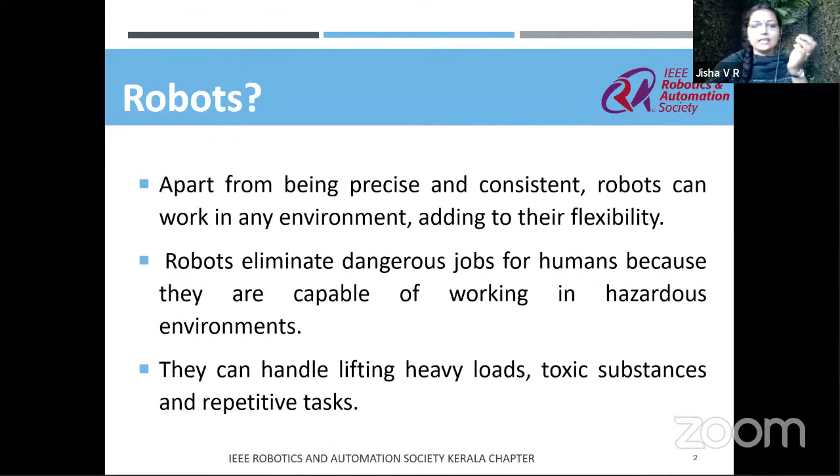And it has attracted many researchers, even though they belong to mechanical, electrical, electronics, or computer science streams. People from many streams are working together to build robots which can serve society. So I thought of taking you all through the current robot statistics.

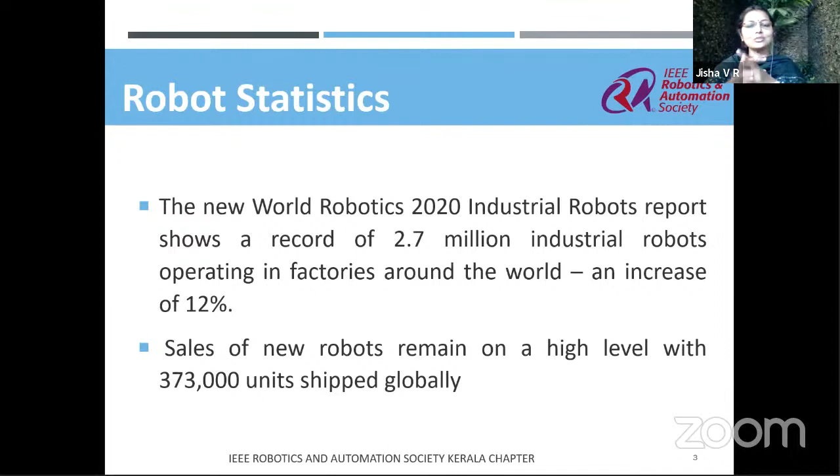The New World Robotics 2020 Industrial Robots Report shows a record of 2.7 million industrial robots operating in factories around the world - an increase of 12% year-wise. Sales of new robots remain at a high level, with 373,000 units shipped globally, so we can just have a feel of the market.

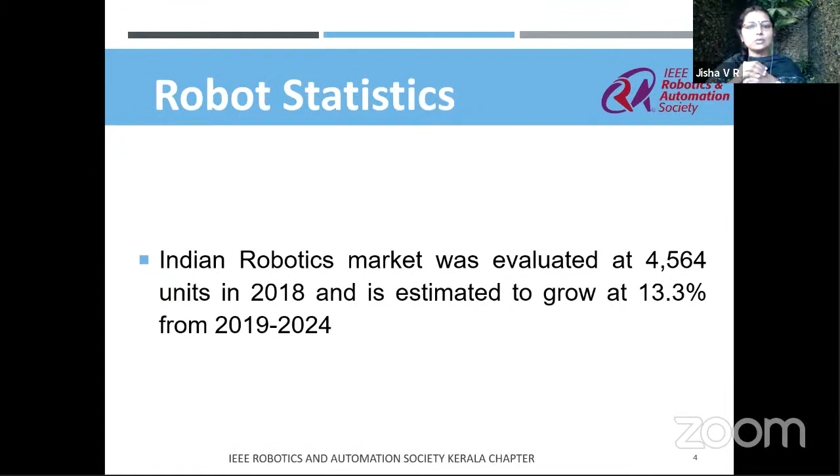So the Indian robotics market was evaluated at 4,564 units in that year, and it is estimated to grow at around 13.3% from 2019 to 2024. So everywhere that growth is seen.

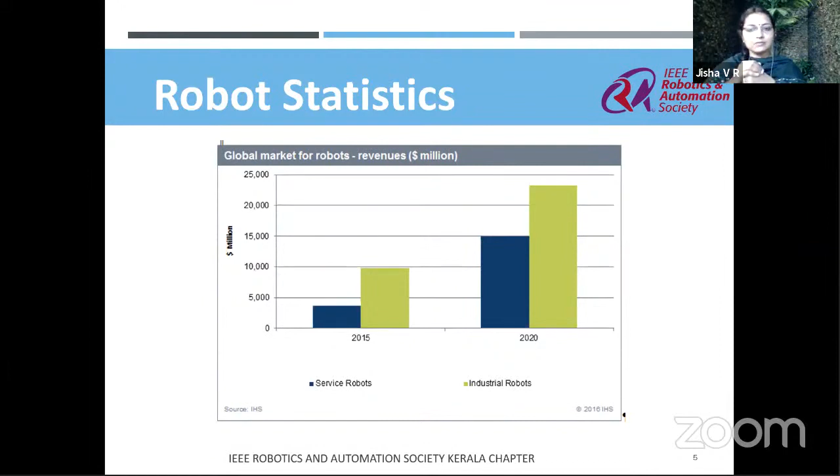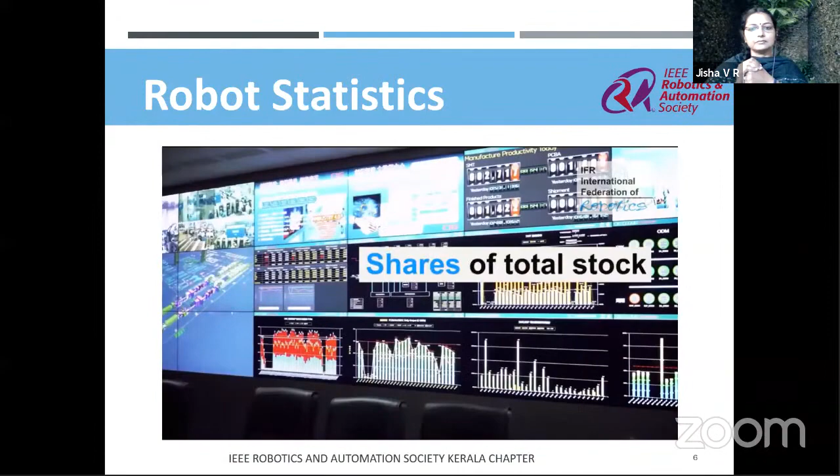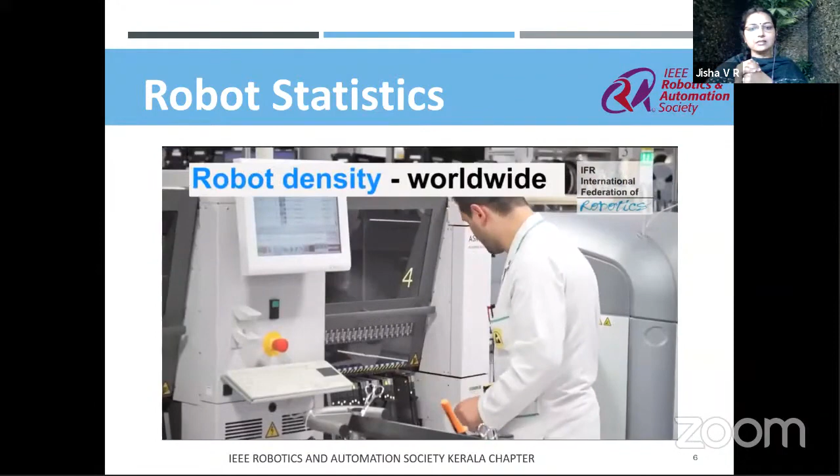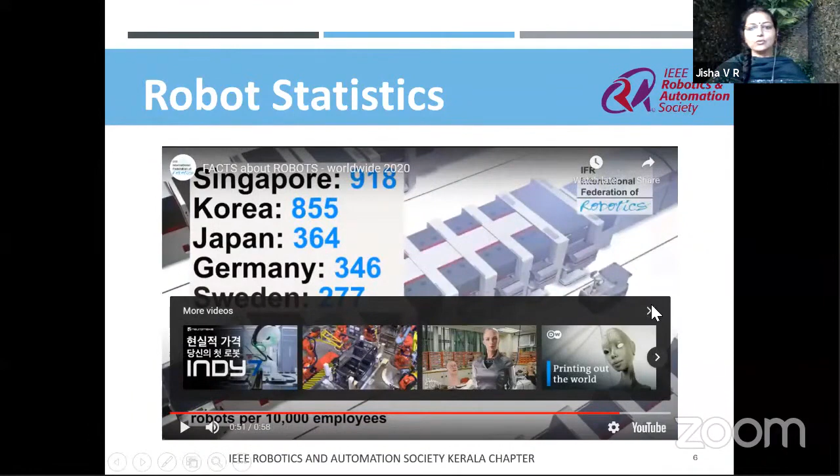So here's another picture of the number of robots by country. See, 13.8 billion US dollar value of new installations, 73% of installations in the top 5 countries. This shows the robot density worldwide - an average of 113 robots per 10,000 employees. If you look at this statistic, Singapore is leading with 918 robots per 10,000 employees.

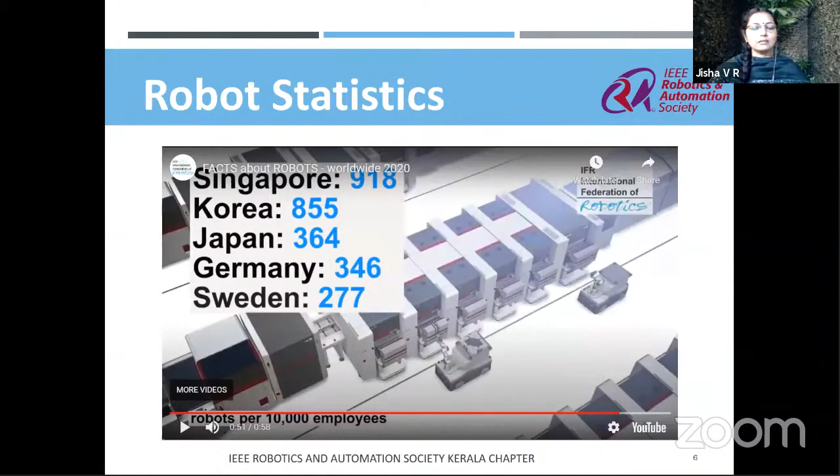So we could see that the market is growing. A lot of robots are being used.

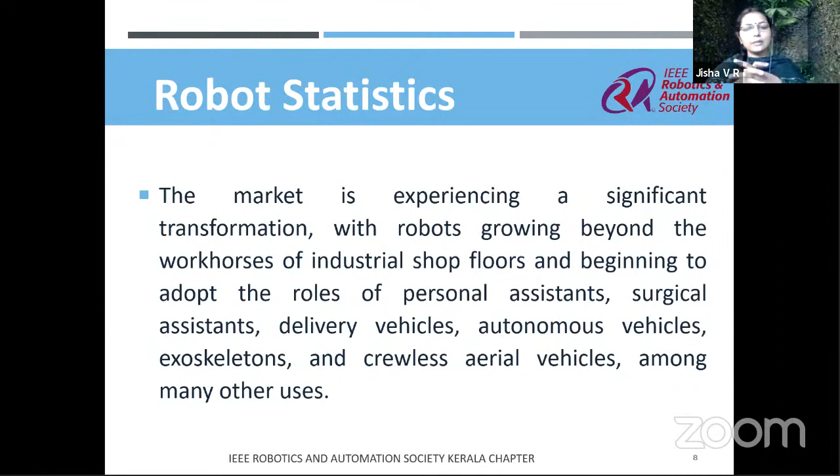Looking at all this, we can understand that the market is experiencing significant transformation, with robots growing beyond the workhorses of industrial shop floors. Even though I showed that industrial robots dominate compared to service robots, nowadays we are beginning to adopt robots as personal assistants, surgical assistants, delivery vehicles, autonomous vehicles, exoskeletons for rehabilitation of paralyzed or partially paralyzed people, and crewless aerial vehicles, among many other uses.

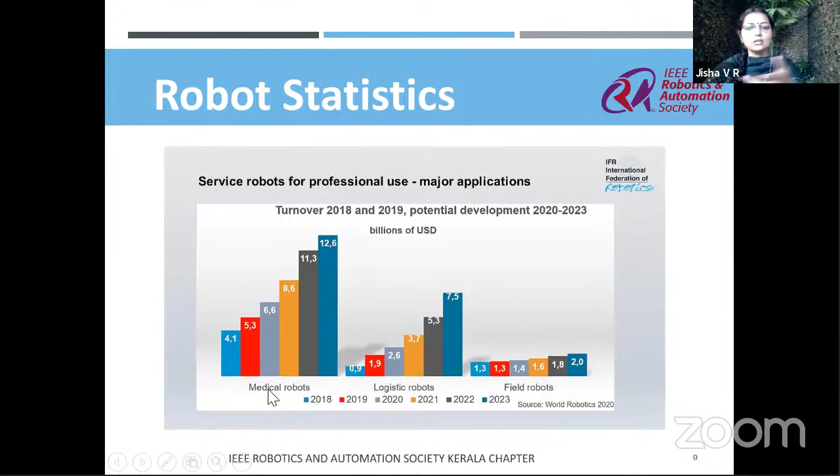And logistic robots - the count is also increasing, and these are used in field robots, which are robots used in outdoor environments. So there is significant growth in the count of robots being employed in hospitals and classified as medical robots.

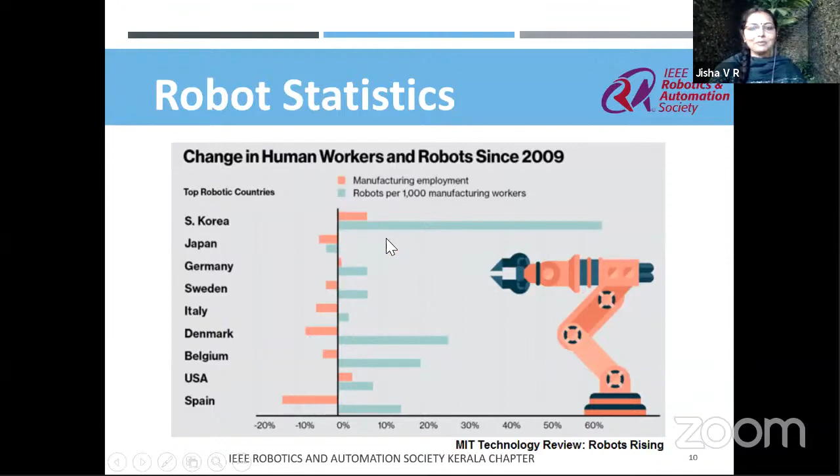This is another picture showing the change in human workers and robots since 2009. The peach color shows manufacturing employment, which is the change in human workers. If you look at this, in many countries the change in human workers is actually in the negative direction. This shows robots per 1,000 manufacturing workers, and in the majority of places, the robot count is much higher compared to the number of human workers.

So maybe in future, do we have to witness a picture where all human workers will be replaced by robots? Will that be the future? We need to wait and see.

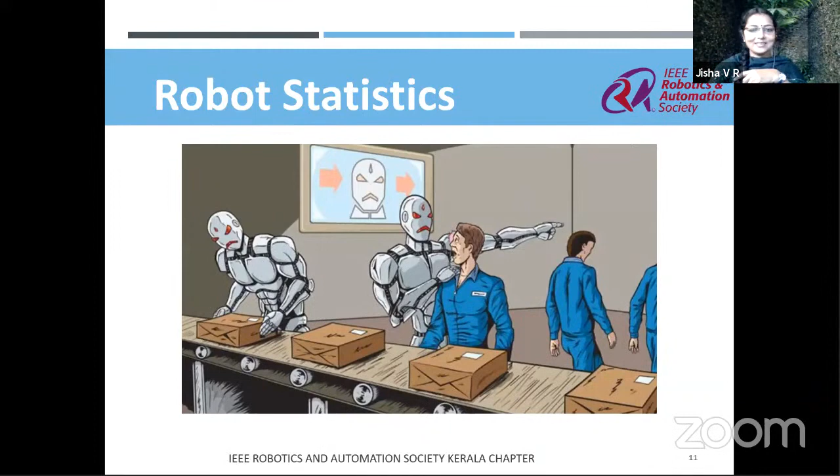If you look at the COVID-19 scenario, we all have seen that as social distancing is to be practiced mandatorily, robots are a very good tool for this, and in many places we'll be able to employ robots during COVID-19. This is one of the robots employed in Kerala. Let's have a look at this video.

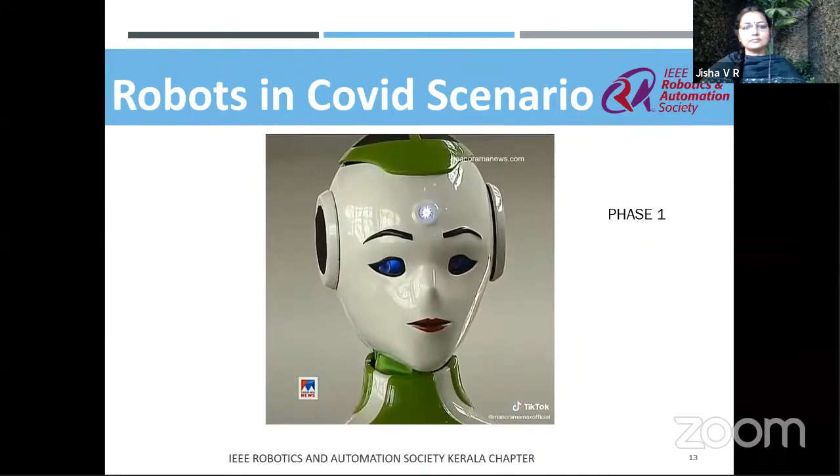So this is actually a robot which was built by Asimov Robotics.

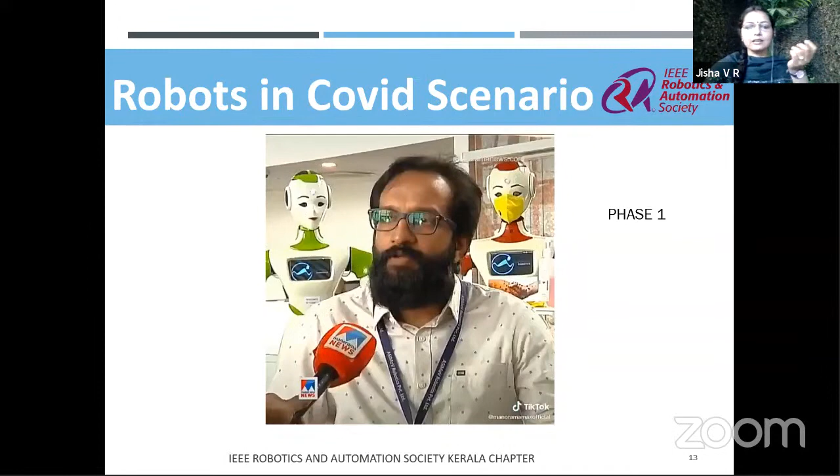This is called Saya bot. Robots of this sort can be used widely in many places, right? In shopping complexes or industrial environments also, instead of a security personnel, we can deploy these kinds of robots. This is an example where in Kerala also these kinds of robots are being employed.

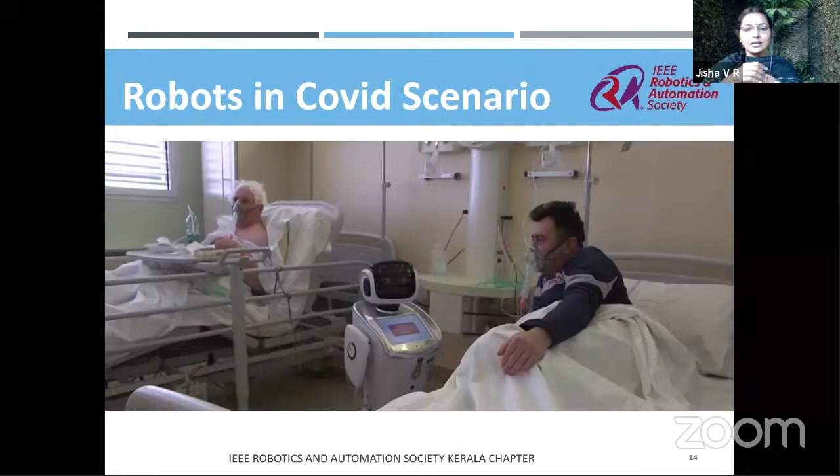Already we know that there are many devices connected to the patient, and many of the parameters will be displayed on the monitor. The main parameters can be transmitted through this, monitored, and transmitted to the doctor so he'll be able to analyze them. Instead of wearing a PPE kit, they'll easily be able to see. It's not that we can completely operate all these ICUs with robots, but in between, we'll be able to deploy them too.

This is another scenario where food is being delivered. This is a scenario in Tamil Nadu where a robot was being used to deliver food to the COVID affected patients in the COVID ward, which could also ensure social distancing. No one has to wear a PPE kit and go distribute medicines or food material. This is another scenario.

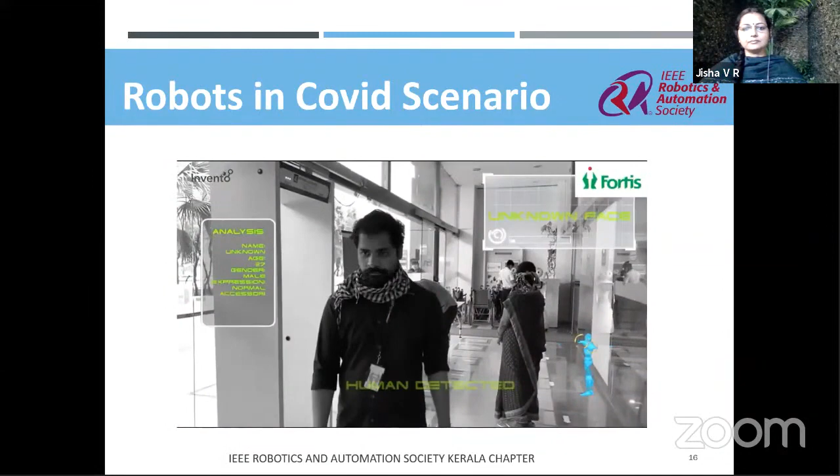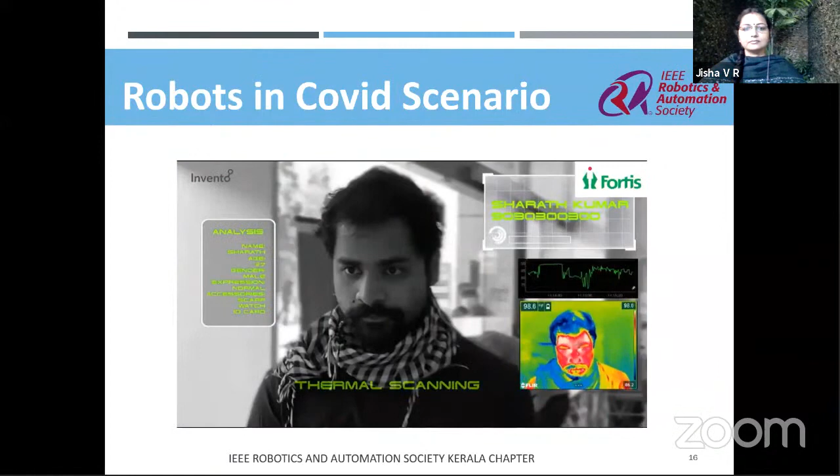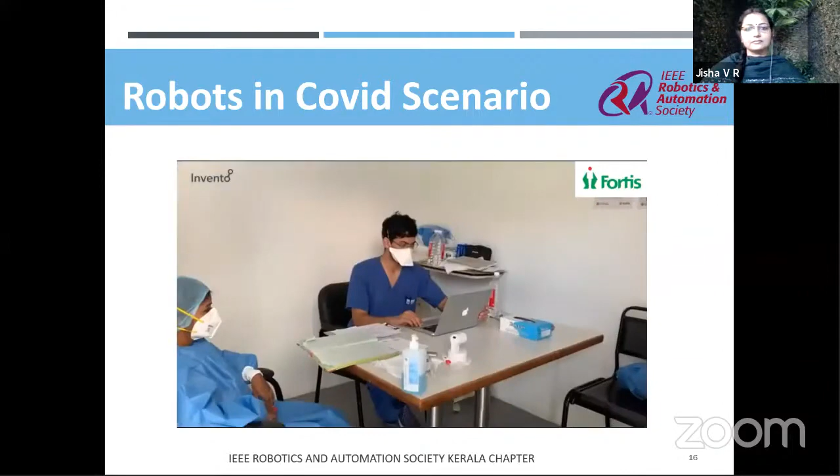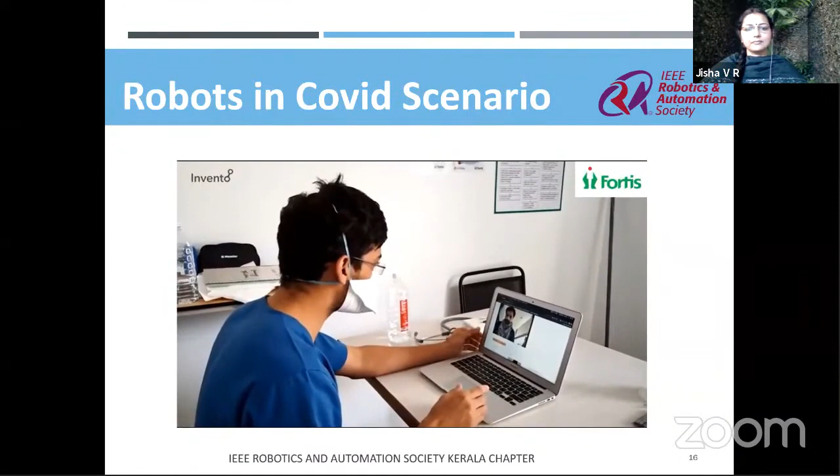Hi. Name please. Sharath Kumar. Phone number please. 9030-300-300. Let me check your body temperature. Please take a step back and look into the camera. Your current body temperature is 100.8 degrees Fahrenheit. Do you have a fever, cough, throat pain or difficulty in breathing? Yes, I'm feeling feverish. The screening is complete. Now you will need to go to flu clinic for further assistance. Hi, Sharath. I see that you have fever with high temperature. Let me connect you to the doctor. How are you today? I'm feeling feverish, doctor. Do you have any throat pain or breathlessness? No, doctor. It looks to be normal fever and not COVID. Mitra will issue the entry pass for you. Thank you. Please collect your pass and proceed through gate number 2.

Yes, we could see that in many places, human intervention could be avoided, and many stages of scanning were completed with the help of this robot. Even the admission ticket was issued by the robot. See how it is helping us.

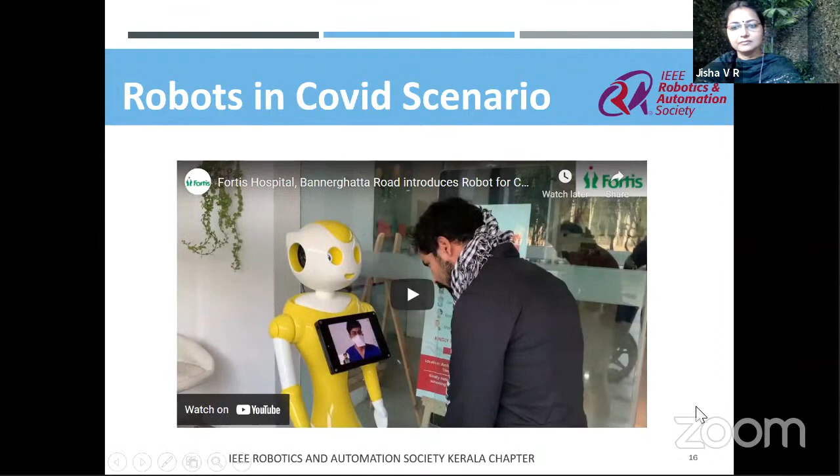So the scenarios I mentioned previously are all hospital scenarios. In the current context, applications of this sort like self-driving home delivery systems will also be a useful application, which we can try to adopt in future.

So you can just have a look at this one.

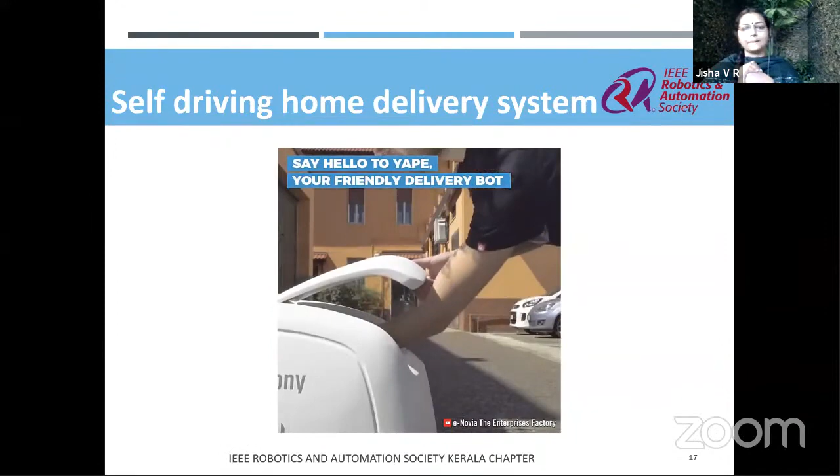It's able to avoid obstacles also.

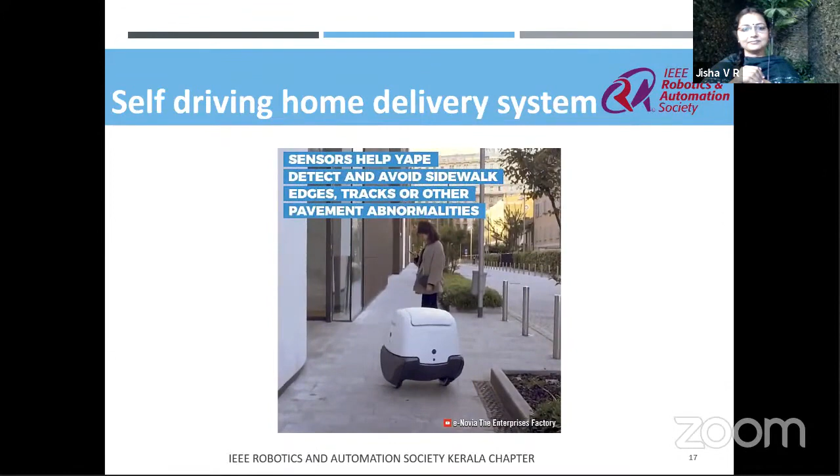So it's reaching the destination, and see how easily the delivery of the packet was happening. So maybe this can also be the need of the day for us too, and we need to think of delivery systems like this sort as well.

So this is another scenario wherein the delivery is being done using drones, which are referred to as aerial robots. Like in the previous case, we can rely on that when the distance is not much, maybe in a flat complex or a residential area. But if the distance is more, we can think of a drone delivery system.

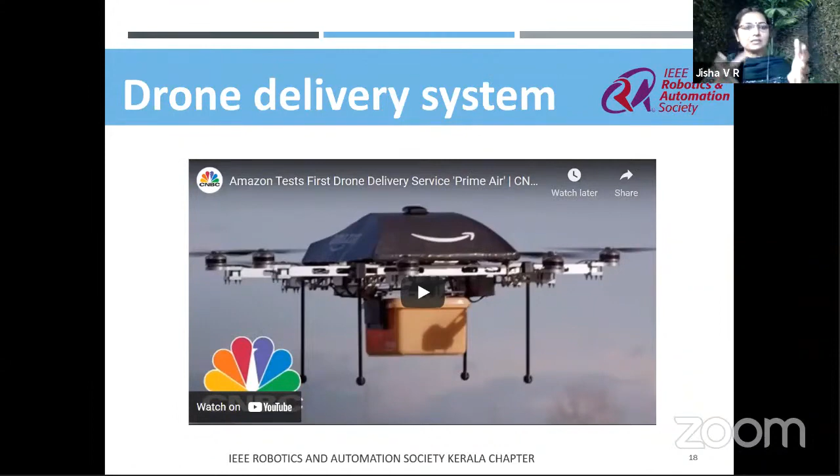But in India, the scenario is totally different, we should say. Maybe the rules and all have to be changed if we need to adopt this kind of delivery system. So this has already been implemented by Amazon.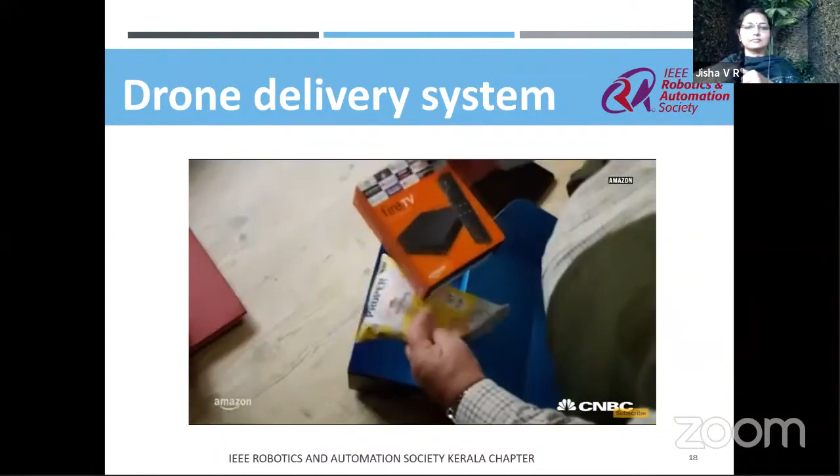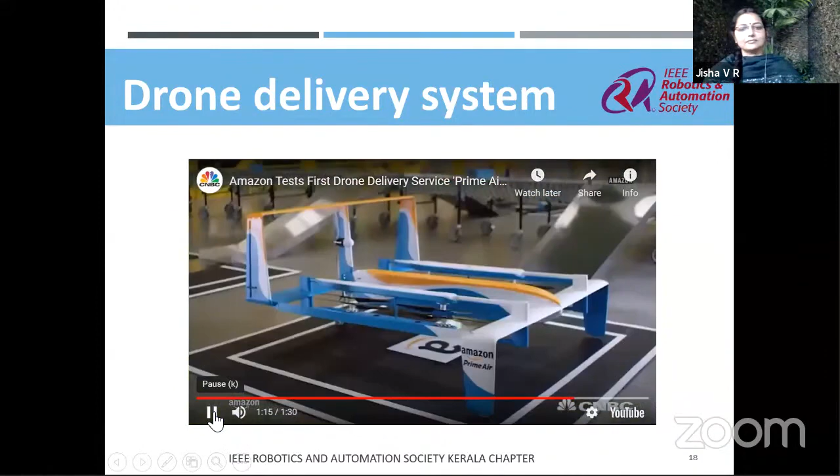A demonstration of how the packages are delivered via the drone system.

So for all of us engineers, there are so many challenging tasks. If you look at all these examples, whether you are a mechanical, electrical, electronic or computer science engineer, there are a lot of research problems which are open for all of us. And there are many challenges in the mechanical design part, the actuator selection, the control part, the path planning, the guidance. So there are a lot of problems which are to be solved.

If we look around the Indian scenario, we could not see these many kinds of applications. Maybe in future we can witness many more applications like this.

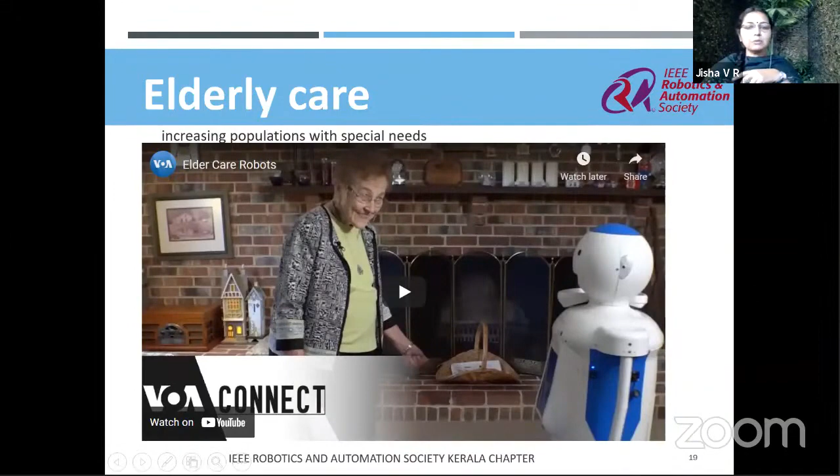So this is a robot which is being deployed for elderly care. We could see that there is an increasing population with special needs, so this also we may be able to witness in future.

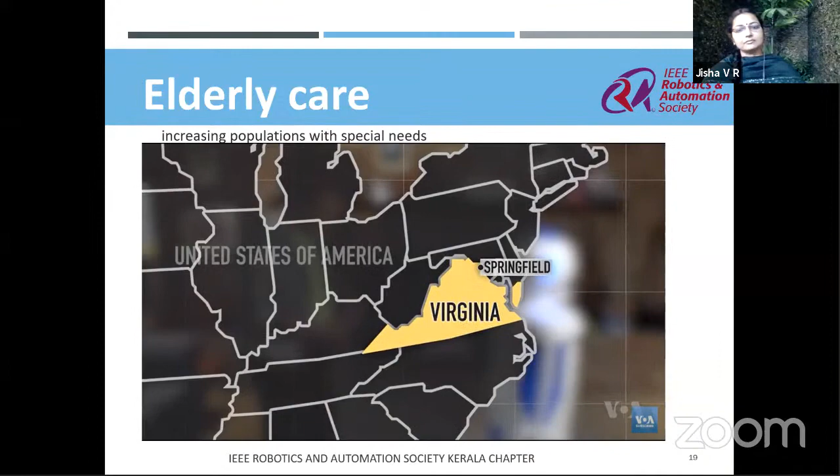Would you like to dance with me? Yes. This song is 'In the Mood' by Glenn Miller.

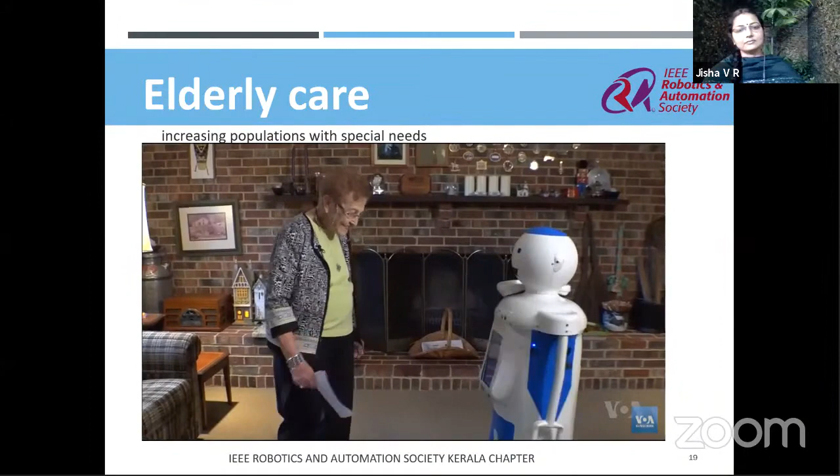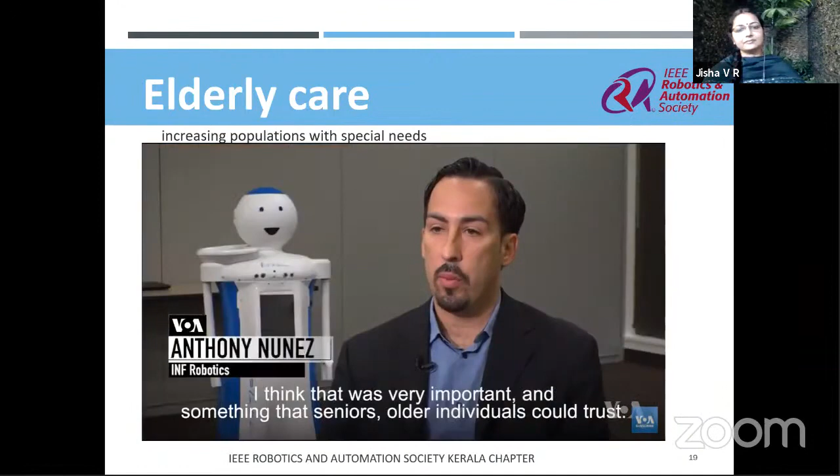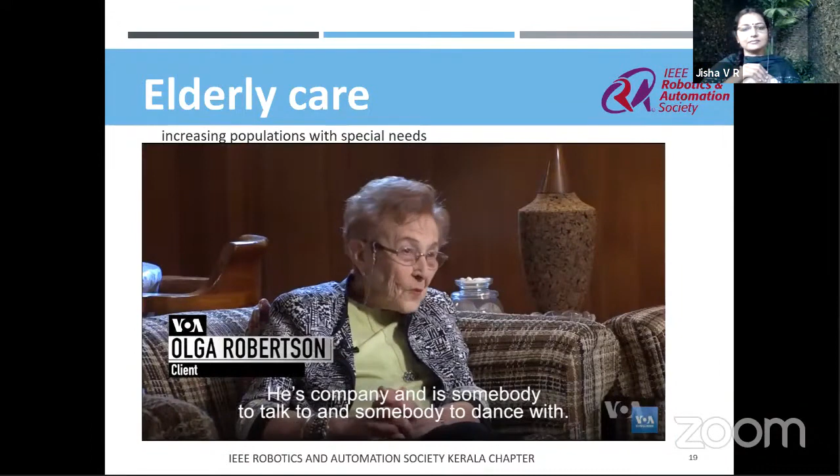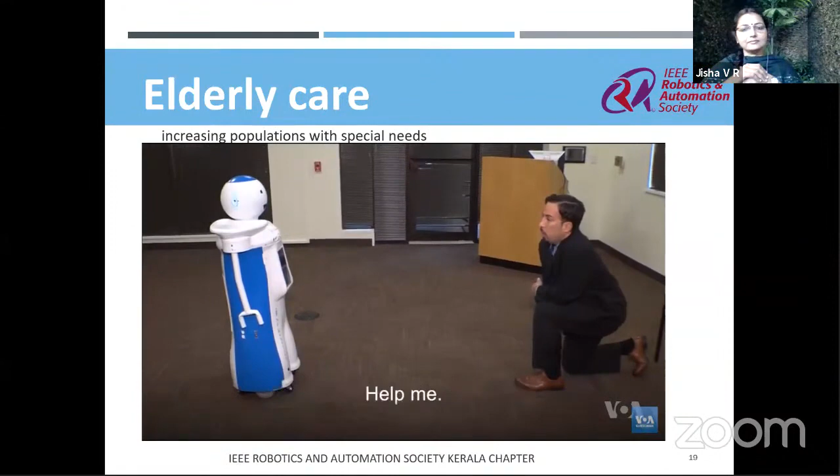Basically acting as a companion. What we wanted to do was design a robot that's easy to use, designed specifically for seniors, but also affordable. I think that was very important. It's something that seniors, older individuals could trust. He's company, and there's somebody to talk to, and somebody to dance with. I like the song that he plays, actually. Okay, Rudy. What would you like me to do? Help me. Have I reached you? Remember to take your morning medication, Anthony.

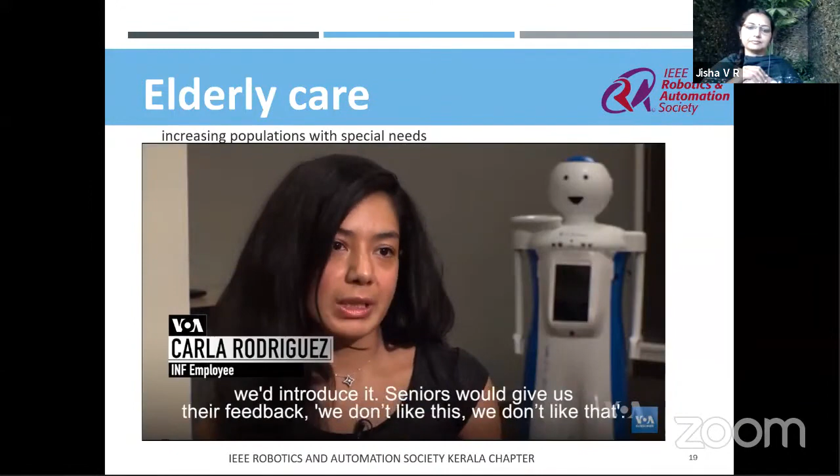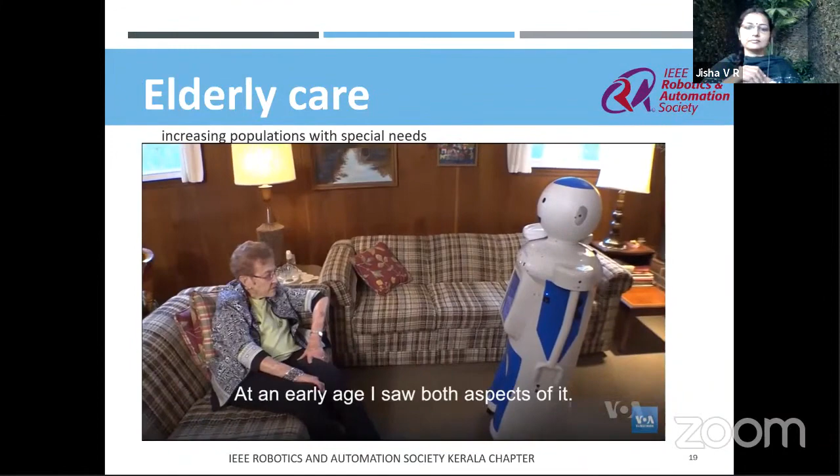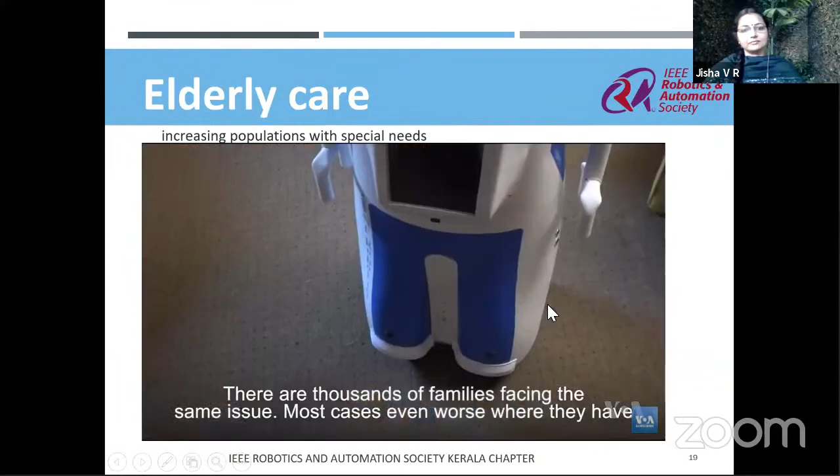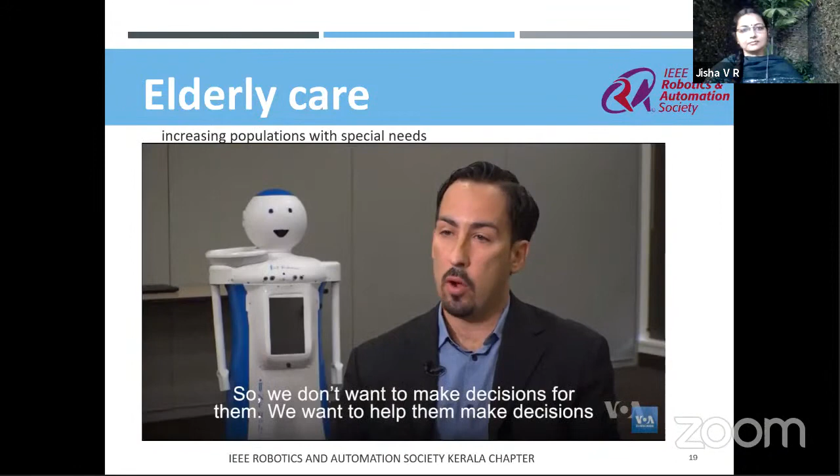We always had seniors involved, and every time we had some type of communication, we'd introduce it. Seniors would give us their feedback, saying they don't like this, they don't like that, and we'd come in and change it. At an early age, I saw both aspects of it, and as I grew older, I realized we weren't the only family facing this problem. There are thousands of families facing the same issue, most cases even worse, where they have a loved one they're taking care of, and the cost becomes an issue. So we don't want to make decisions for them. We want to help them make decisions and really give the power back to them so that they can stay independent.

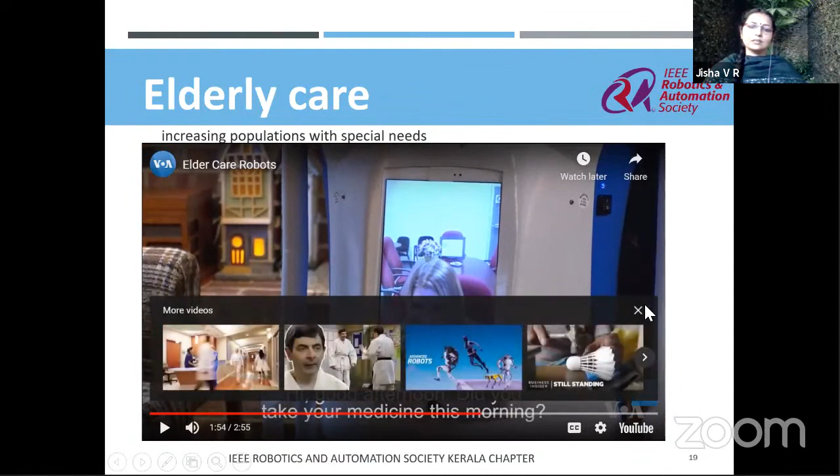So this robot is able to communicate with people who are far away, and these kinds of robots are able to deliver food and medicines also to elderly people, and also give company as well at times, and also remind them to take medicines.

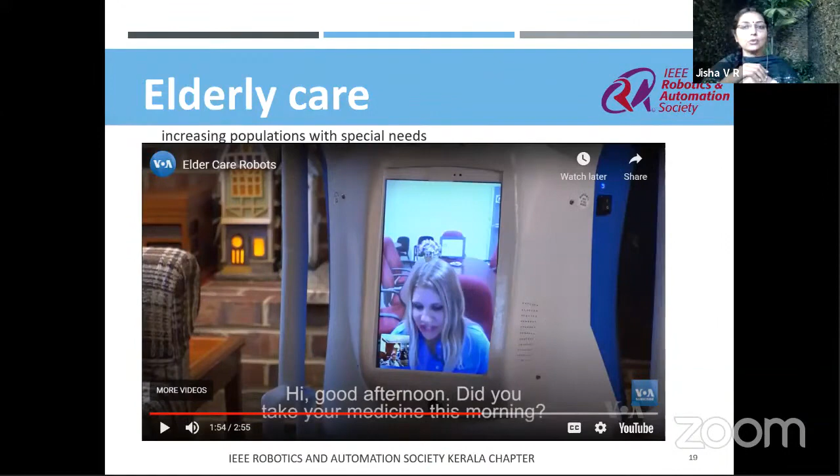So the number of robots deployed for elderly care is also increasing nowadays. In one of the slides, I have shown how the number of robots used in the medical industry, which I termed medical robots, is increasing.

Nowadays, robotics has coined a term where the robotics or automation part associated with the medical industry is termed like this: Healthbotics. So starting from consultation...

So if you look at a video like the one from Fortis Hospital, the robot which was employed there in that video, you could see that the primary consultation is being done with the help of that robot, right?

And the initial diagnosis too, like the preliminary, the primary symptoms - the robot is capable of doing that. If you think of adding more autonomy or artificial intelligence to the system, it will also be able to prescribe medicines as well. So maybe in future we can see these kinds of robots being used for prescribing too.

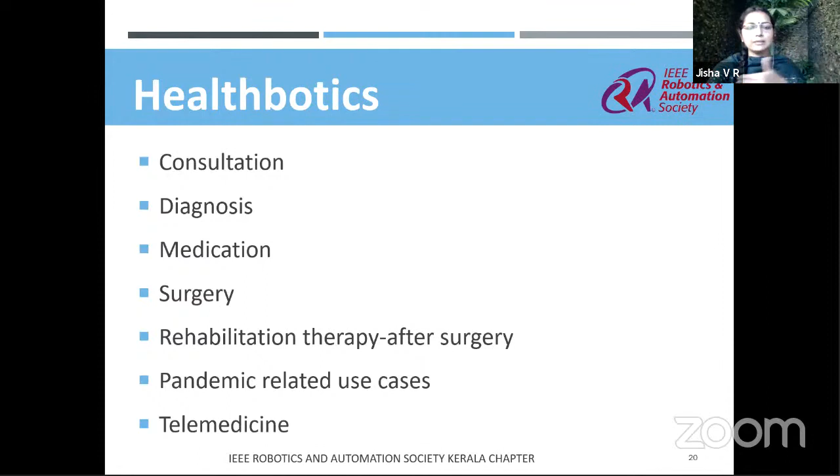Now what is going to be the future? Because of technological developments, we can see that the cost of robots will be declining, maybe approximately 10% per year. Now maybe you all are aware of the Roomba robot, which is a room cleaning robot - now it is available at affordable rates. Many of us are using that robot, but earlier we were not at all aware of that, maybe because of the cost. But the product price is decreasing.

And within the next decade, we'll see specialized robots with vision and high precision dexterity, and there'll be a drop in price for those kinds of specialized robots also. So along with reduction in cost, growing capabilities will make innovative uses of robots possible. So even though initially we will be hesitant in procuring these robots, in future we'll also be forced to buy these kinds of products, I think.

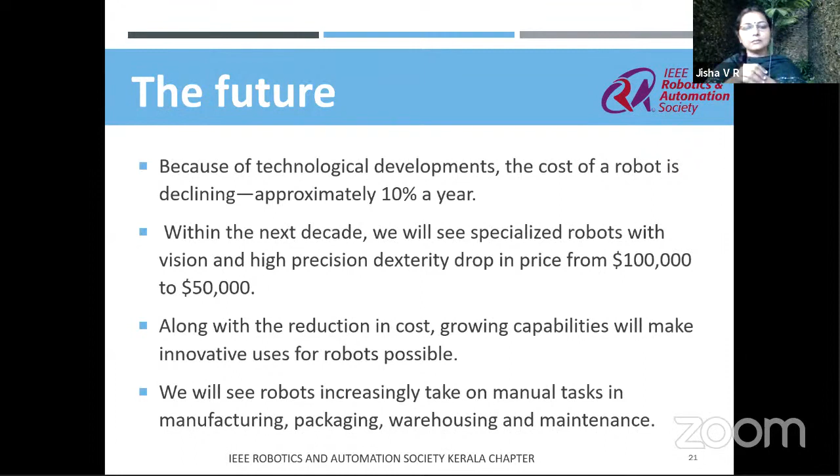So we'll see robots increasingly take on manual tasks in manufacturing, packaging, warehousing, and maintenance. Everywhere we could see many more robots being employed. But maybe I can say that in future, during our IEEE ExeCom meetings or IEEE AGMs, we could see these kinds of robots helping us in delivering tea and all. So I think maybe in 10, 20 years, the younger generations of IEEE members will be able to see these kinds of scenarios.

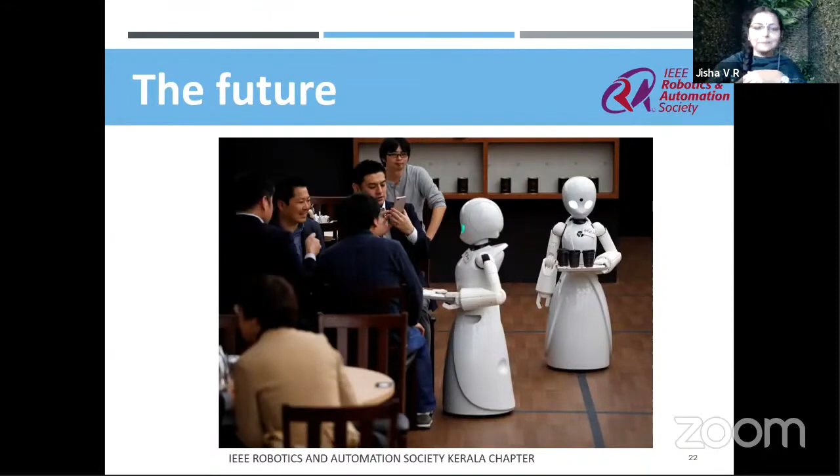So what are the challenges? Like when the number of robots is increasing, the human-robot interactions are increasing, there are many challenges coming up as well. So we need not forget that part of it, right?

There can be issues of privacy - just imagine we are using robots for elderly care, and our parents are using this and no one else is there, and there's a camera attached to that, and it is actually connected to the network also. So as in computer network security, in this case also there can be problems, like if someone wishes to intrude and look at the surroundings - whether it's okay, whether I can come and steal something. That kind of thing - there are going to be issues of privacy and manipulation, opacity, and bias. You cannot say that it is 100% safe. So in that scenario, how can we overcome those kinds of challenges?

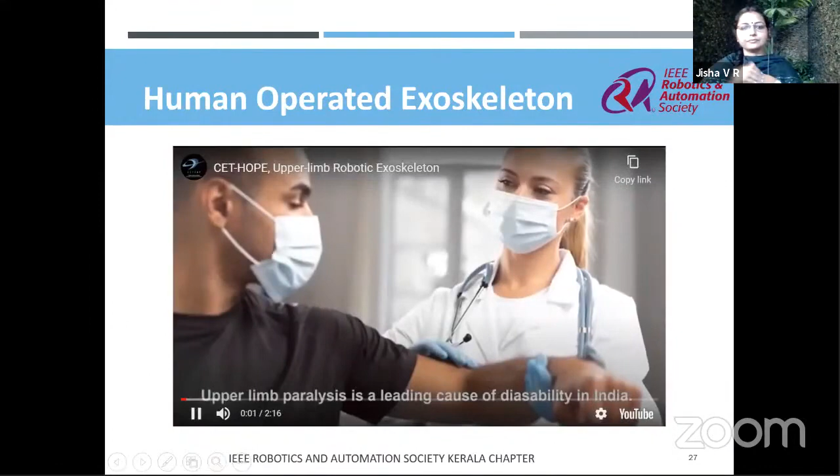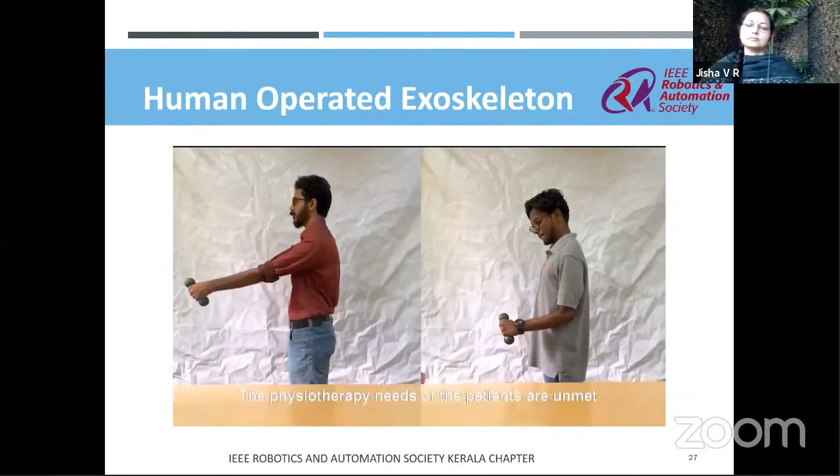Upper limb paralysis is a leading cause of disability in India. Over 1.8 million Indians suffer from stroke every year, and at least 10% of all patients injured in road accidents suffer brachial plexus injury and spinal cord injuries. The physiotherapy needs of these patients are unmet due to a lack of the required number of qualified physiotherapists. So we did this in collaboration with ICFOSS.

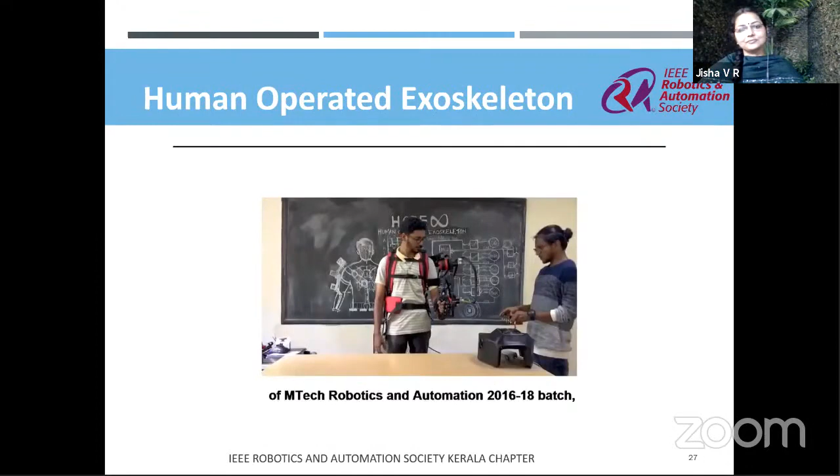See, Arshad is actually semi-paralyzed, he's not able to move. The project started as a mini project by Arshad A. Samad and Menino Fruto of MTech Robotics and Automation 2016-18 batch at CET Center for Interdisciplinary Research, later collaborated with ICFOSS to realize a final prototype.

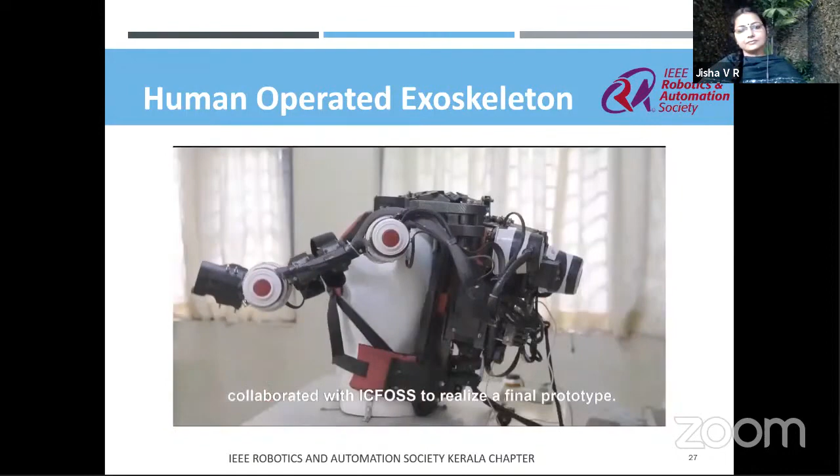This exoskeleton can work as a wearable physiotherapeutic assistance for those who are suffering from upper limb partial paralysis disorder. It has 5 degrees of freedom and is controlled to sync with the natural movements of the user.

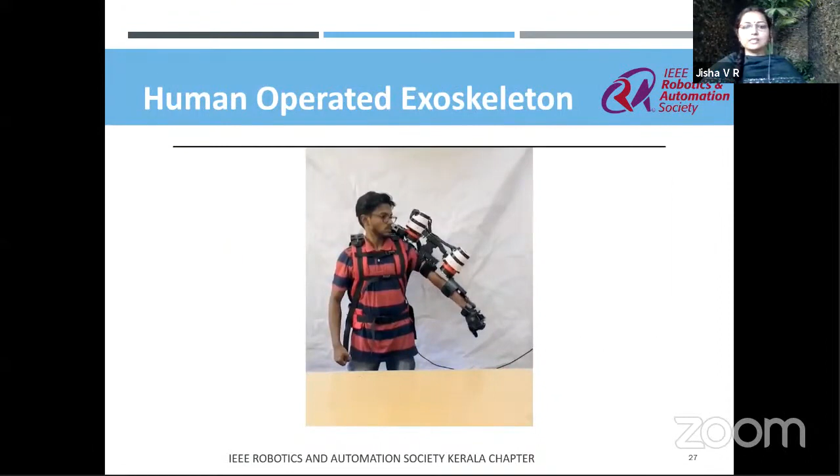So you could see that he's able to move his hand. Actually, he could move only a little bit before, but using this now he can. To make it wearable, 90% of all the parts were made using 3D printed lightweight materials.

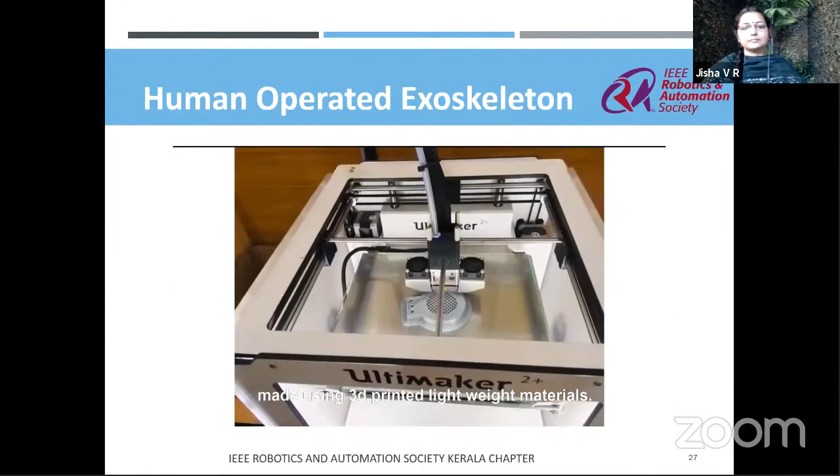To start with, we tried to address the physiotherapy needs of one of the team members who was suffering from brachial plexus. He was actually unable to lift his hand beyond a particular point, but using this, he was able to move it in a normal way. So definitely these kinds of robots can be used for rehabilitation purpose.

For partially paralyzed patients, it's like what generally a physiotherapist does. So that kind of movement, initially the patient will be able to take up, and later he'll be able to move his hand in a regular manner. So that's one of the works which we took up.

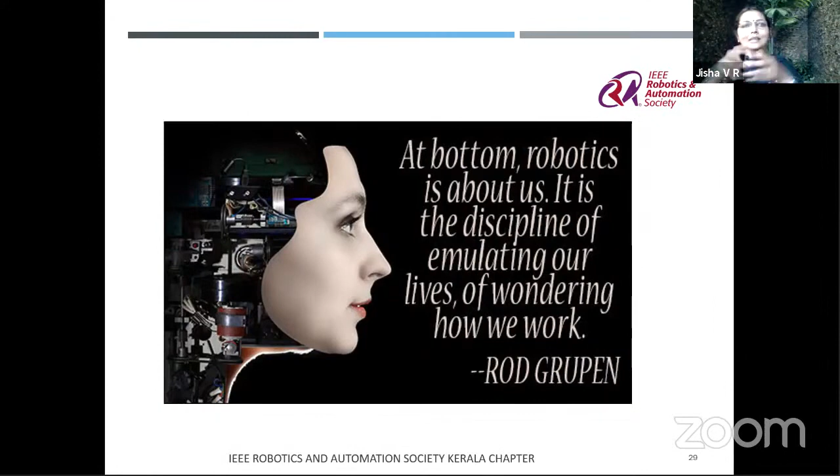So now you might have seen how the exoskeletons are helping people who cannot walk. They are able to walk wearing these kinds of exoskeletons, right? So different parts we are trying to understand more and more, and trying to recreate like this.

And so with this message, I'll be concluding today's session. One machine can do the work of 50 ordinary men, but no machine can do the work of one extraordinary man. So still humans will be dominating, because we are the masters in programming or making these robotic systems autonomous, right? So in that way, definitely we'll continue to be masters in future too.